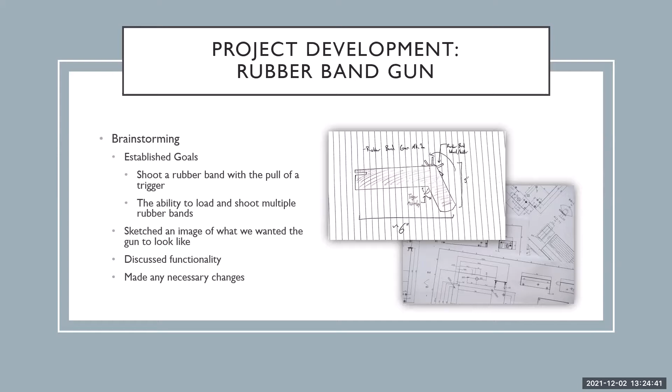Once we had a plan, we put the design into SolidWorks and played around with the dimensions and tolerances for the interconnecting parts. Once we had finalized those, we were ready to move the drawing to the 3D printing stage.

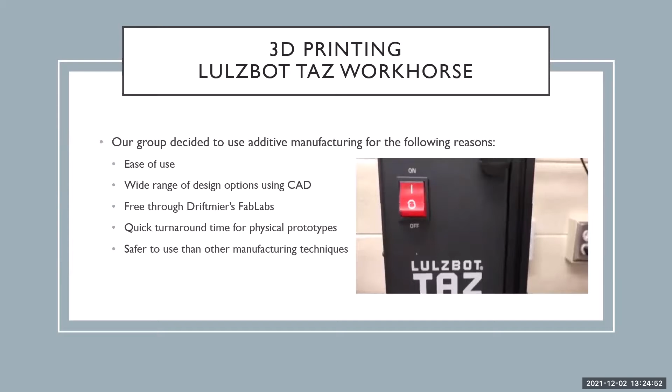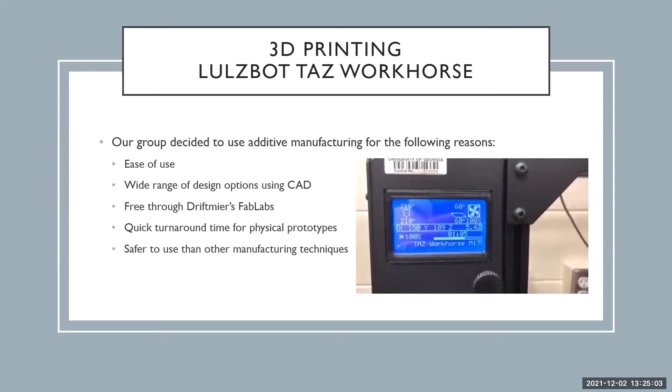Our group decided to use additive manufacturing for the following reasons. It's easy to use. It has a wide range of design options using CAD. It's free through Driftmier's FabLabs. It has a quick turnaround time for physical prototypes, and it's safer to use than other manufacturing techniques.

So as you can see, the 3D printer builds up the rubber band gun layer by layer, and each layer amounts to about 100 micrometers. We converted the SolidWorks file into an STL file, which stands for Standard Tessellation Language, which allows us to communicate the file to the 3D printer.

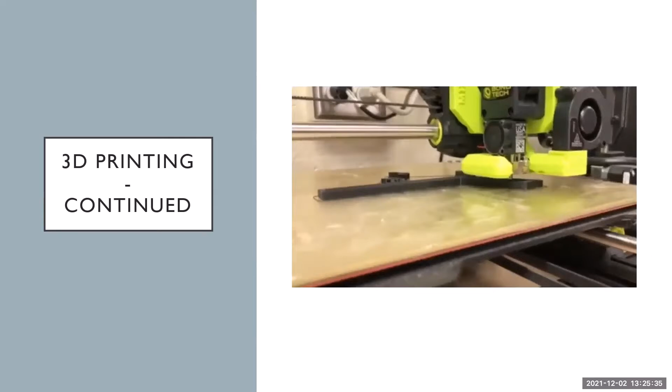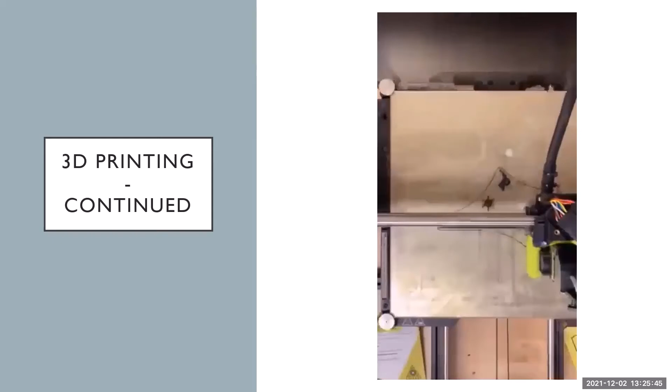So as you can see through this video right here, the rubber band gun is being built up layer by layer. The actual time that it took for the rubber band gun to be constructed was about 1 hour.

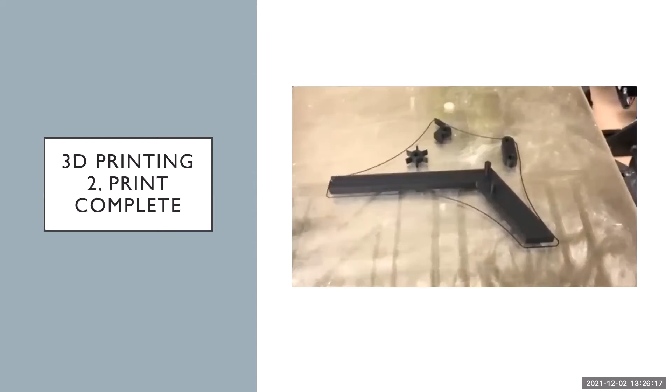As you can see, this is the final product and all of its components. And as you can see, you have to actually pry the product off of the surface to get it off.

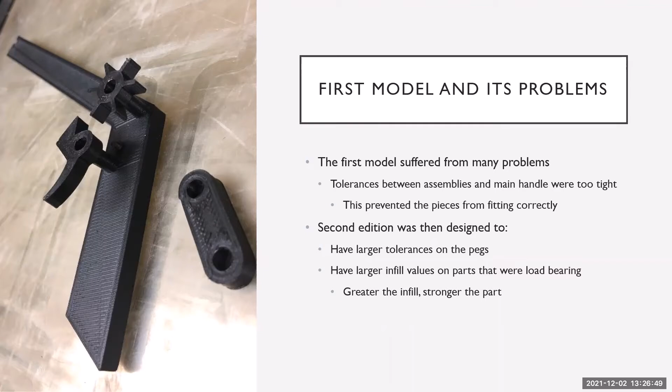The first model suffered from various fitting problems. Tolerances between handle pins and the trigger and pinwheel were too tight, preventing assembly of the parts. We also determined that we wanted larger infill values for load-bearing parts for greater strength. So the main focus of the second design was to fix the tolerance issues and increase the infill percentage.

The second design successfully solved the issues from the first. We were able to assemble the parts and had our first functioning prototype. However, there were still more problems we wanted to solve. Because of the trigger design, we were only able to shoot one rubber band at a time, and the gun was also uncomfortable to hold because of the slim main body.

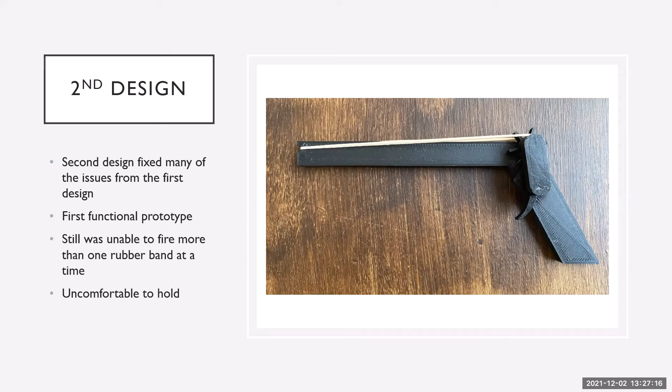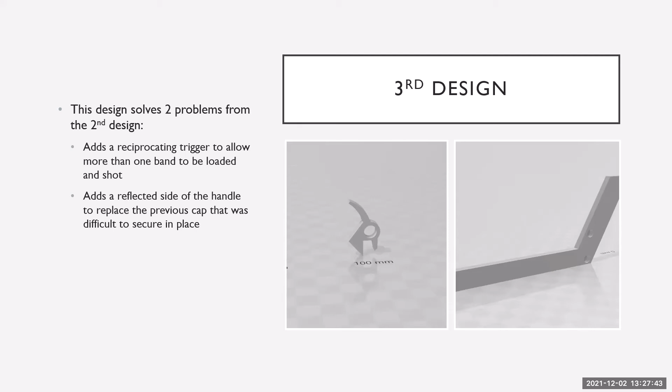Our final design solved two problems from our previous design. We added a reciprocating trigger to allow more than one band to be loaded and shot. We also added a reflected side of the handle to replace the previous cap that was difficult to secure in place. Here's a demonstration of our prototype operating. As you can see, it was able to hold more than one rubber band.

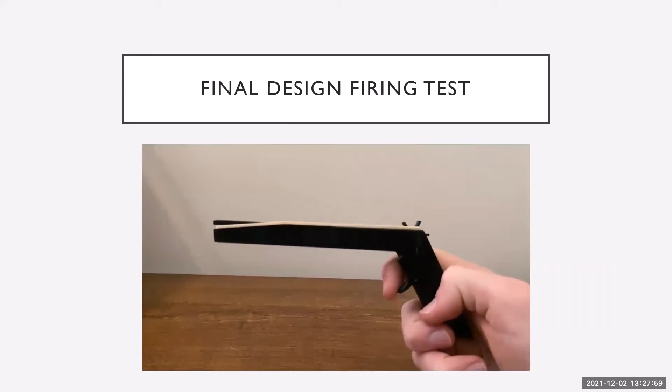We were able to achieve both goals that we set for this project, which were to shoot a rubber band with the pull of a trigger and be able to load and shoot multiple rubber bands. The 3D printer helped us to achieve these goals because we were able to quickly redesign and print any parts that needed adjustment. This flexibility is what allowed us to refine the products to fit our original goals.

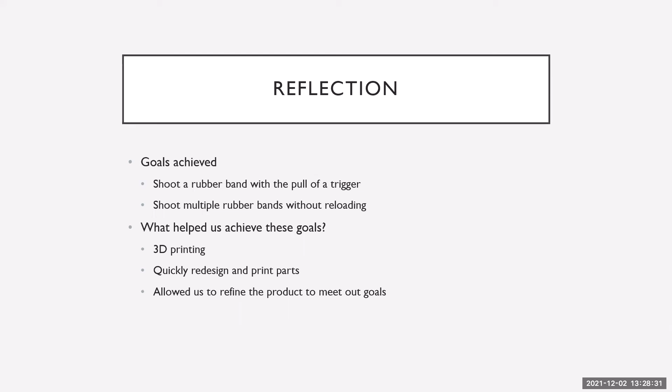Our group followed a few safety precautions to ensure the safety of our members. One of the main safety precautions we followed was eye protection at all times in the Fab Lab facilities and while testing the gun. We also wore closed-toed shoes to protect ourselves against superheated plastics from the printers and from other debris in the Fab Lab facility. We also maintained social distancing with other teams.